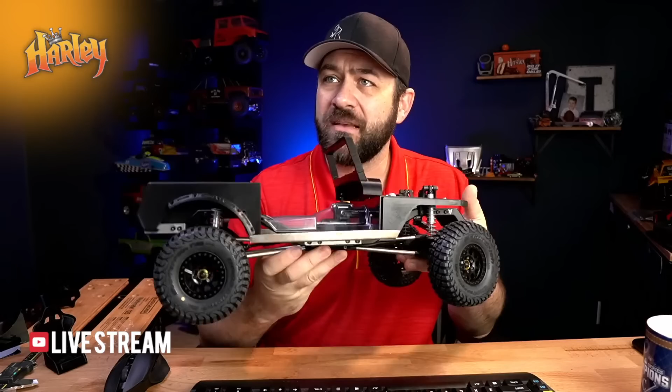But I am working on a project right now for Scale Nationals, my Class 1 truck specifically, and it's got a lot of 3D modeling that I've been doing for it. I've basically been designing most of the car in 3D so that I can get it fabricated, and I'm trying to use as many tricks as I can to get this thing done right.

This week, I'm not bringing the show back normally, but I figured I would show you exactly what's going on in this one, so it won't be necessarily entry level. It's just things that I've got to get done. That's why I fired this thing up. Does that make sense? Hopefully some of you enjoy it. Maybe it won't be helpful, maybe it will. We'll just dive in.

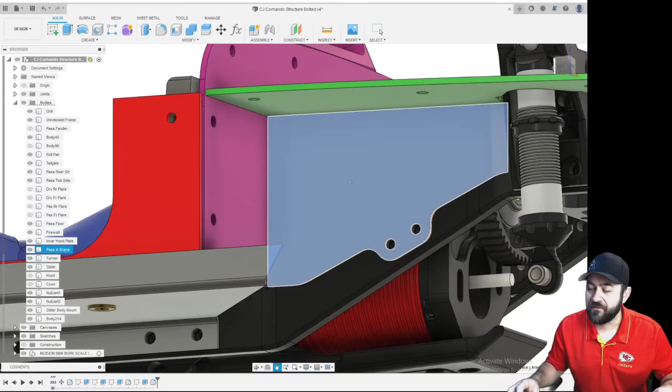So the plan for this thing is that I'll have these panels here - can I isolate just those? Let's see if it'll let me. No, it's gonna... we'll turn on the one, and I need the floor, passenger floor. There we go. So this is basically going to be the parts of the structure that will bolt to the chassis and allow me to fasten the body panels to it.

Now, I need to attach these things to each other, so that's kind of what I've been working on. I'm coming up with some parts that will allow me to attach them through and to each other.

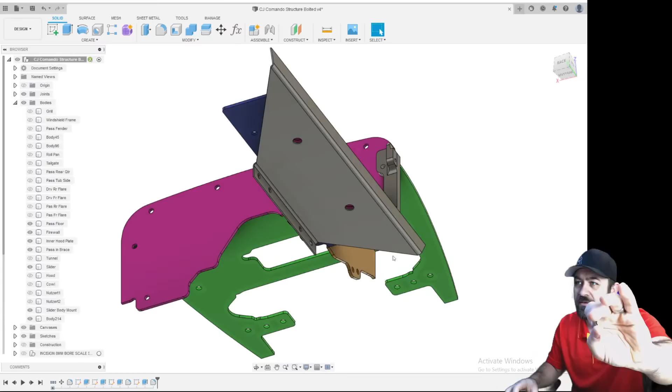There's this one that will go underneath of the floor and will attach to the slider. So my slider is this panel. Those holes that are in there are little nutserts, and you are not going to be able to see what I'm showing you here in my hand, but I made a test one just in a scrap piece of aluminum. Then I modeled that up so that I could see how the clearance would be for those.

And they basically sit inside, and I didn't even have to adjust my tolerances at all. These are basically a 0.5 millimeter away from the height that I needed. So it'll kind of lock into this, but everything will screw down into it, and it'll all just get nice and compressed.

Now, like I said, I don't have a huge plan today of showing steps or things to do. Just trying to show you what I've got going on.

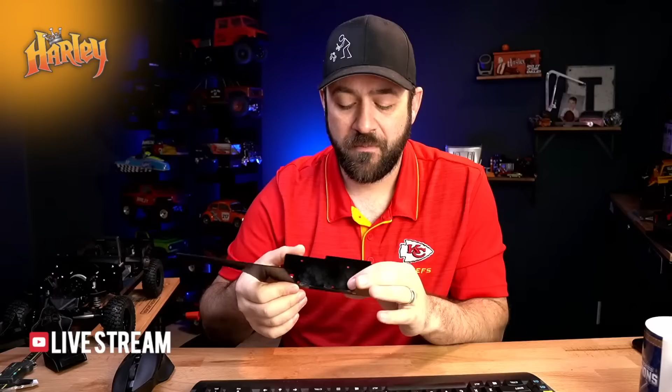So I had initially, in a different design - I'm going to switch back to the other camera for just a second - but in my first shot at this thing, I was going to have the parts use a captured nut system. You can kind of see like that, so the nut goes into a slot, and when you screw through, it kind of pulls everything together. There's a lot of chassis that have been designed this way, and it works okay, but ideally it works with thicker material. This is only 1.5 millimeter, or a 16th of an inch basically.

So it's not right for it, it's not the right pick. So that's why I changed to these 3D printed blocks that are going to help me attach things together, and also will help me keep the body panels all attached to each other, so that there's not big body gaps and things like that.

There's a lot of work in this thing still to do, but now I do have the VS410 chassis in here, the whole deal with shocks.

That's not something that is available. I had it because I have access to that from where I work. So that's a leg up, I will agree. I've got everything pretty tightly designed to that.

You can see this piece here, that's actually how it's interfering. That's because that's the mold for my inner transmission tunnel. It was designed to be the inner tolerances of everything. You can see how it's laying right on the floor and right against the firewall. You can't see anything because you're not showing on the screen.

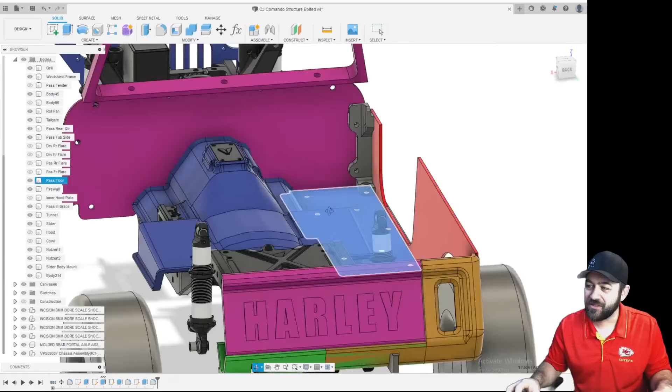So right now I've got kind of working through the thought process of how this is going to go together. The passenger floor, or the floor, is going to be attached to the slider with the nutserts. While these stick out, I'll have another like Delrin type slider plate that goes over that to keep everything from being seen or giving me catch points.

So that will attach to there. This piece will help the side panel and firewall attach to that. What I need to do is attach this inner fender to the cowl, as well as the inner hood plate, which is that. And once I get that all attached, it should make this thing a pretty solid system, I think.

So when I do that, oops, I need the firewall. I need the other one off. Turn that one off, firewall on.

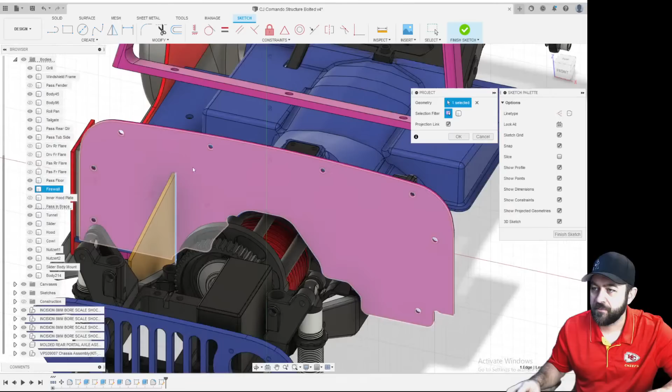So to do this, I'm going to do a new sketch, throw it on that firewall specifically, and I'm going to project a couple of lines. P for project, grab that inner line of that, and I'm also going to turn on that hood plate, turn off that firewall, rotate around and grab that, and then hit OK and turn those things back.

So that just gives me a couple of those things, and now I can isolate that, just turn everything else off. So you just go over to the body on the side, right click and go down to isolate or unisolate. That way it'll just clean everything up for you. Now the only thing it does is turns off that sketch, but we can fix that. There's a lot of sketches in this model.

But I'm going to try and attach this with, oh, I got 3D sketch on. I'm just going to throw a couple holes in the firewall for what'll go along the side, and then I'll probably throw a couple more across the top. Now I'm only going to go to the center line because I'll probably mirror most all of this work.

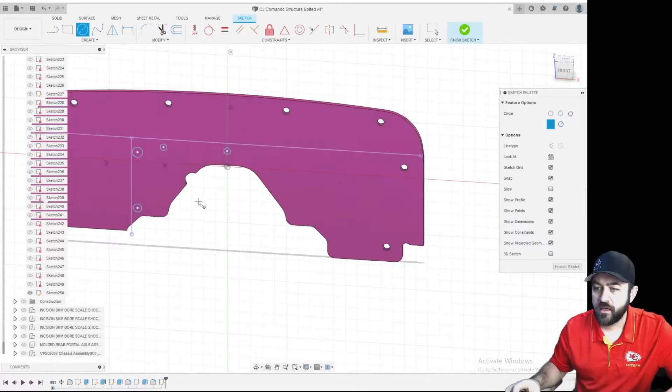What made you choose nutserts? Because the sliders are metal, so it just gives me a nice solid base. That way I don't have to try and weld a blind nut or anything like that. So that was why, really.

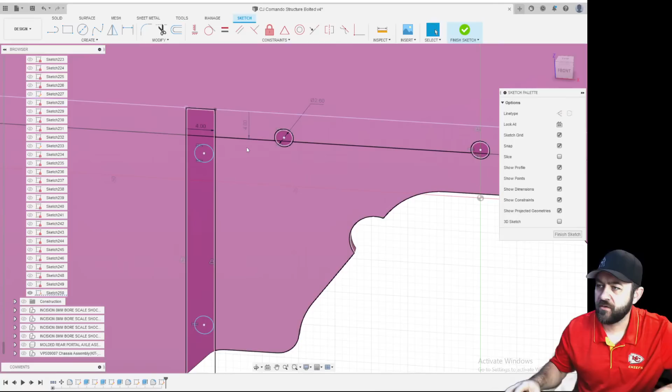I'm going to do an offset line, and I'm going to do like, five's too much, I'm going to go 4. We're going to do 4 down as well. I'm going to turn both of those to construction lines. They're just guidelines for me.

So select them and hit X, and then we're going to make sure that those circles are on those guidelines.

Simple stuff there. Now I haven't dimensioned really where those are going to go, it's all kind of just arbitrary. I like them to be whole numbers, but it's not. I want them to be spread apart enough to help even the load out, make sure everything's nice and supported, but in a way that is just enough. 22, yeah, I like that. I don't want anything to be too close together.

And then, like we said, I want it to be on the center line because I'm just going to mirror it. That got fully defined already because it's a horizontal line direct from the origin.

Now we are going to do another offset line. This is going to be part of the actual thing, but we're still on construction. I'm not going to go too far out, I think 5 is likely enough. My computer kind of struggles with some of this. It's not a weak computer, but there's so much going on in this model that it can be a little wild. You can see those lines intersect, but that's just because I'm going to do an offset on those.

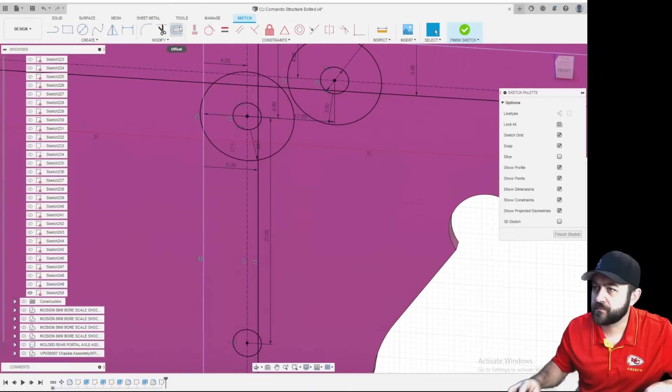So we got that going on. I'm also going to project, hit P for project, select that whole face. That'll give me the outline of everything. I don't need it, but you'll see what I mean. So I've got all of that line work done.

One thing I am going to do is throw a construction line, and actually I'm going to make it a real line. And I finished it up to the top, but you'll see.

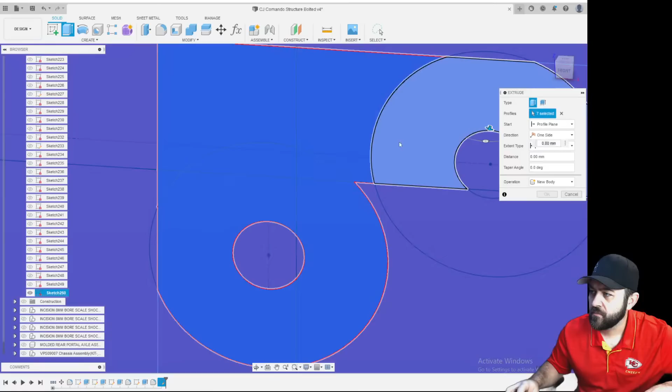Now we're going to hit E for extrude, and then I'm going to select the profiles that I want. Oh, something's weird, try that again. What is it doing there? Somewhere in this area it was acting funny. It's just going super slow since I have so many profile regions. I don't know why it's doing that.

Down here we could grab, we're going to grab it at least. Why not? Okay, so we got that. Now I'm going to pull this up, let's say 4 millimeters, but we're going to do new body, and hit OK.

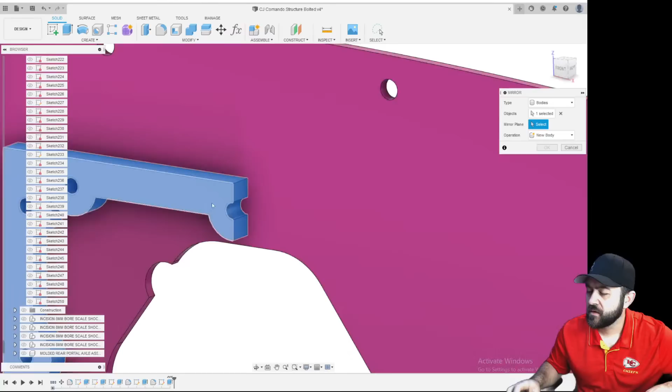So the simple but ugly looking part, I am going to mirror this. We're going to select bodies. Okay, and I did mirror the trans tunnel profile, so that gave me something that still looks reasonable.

Brian Sherwood, thank you, sir.

I missed that one. Are you sure this is not the new body for the next Vanquish? Yeah, no, I don't think so. For one, I don't think this is a fantastic looking body in that way. This is an exercise in being ridiculous for the sake of being ridiculous.

So we've got a couple. I don't know if it'll let me throw two on there, and no, so I'm going to just kind of cheat. I did a 2 millimeter fillet there. I'll do it again now, and then I can clean it up. So we'll stretch this thing down 3, yeah, there we go.

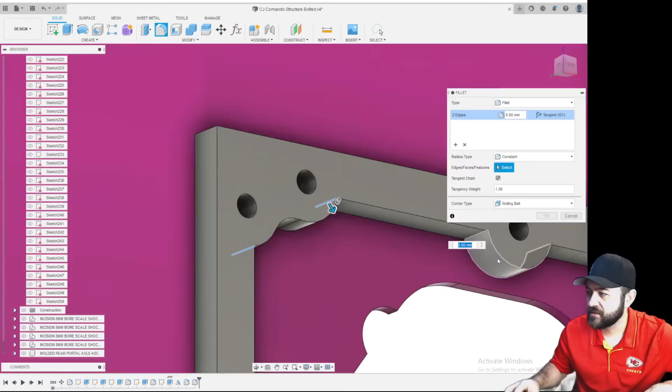Okay, so now I can kind of clean up the part a little bit, add some fillets in the corner. I'll need to do the same thing in that upper corner there, but this is just to smooth it all out a little bit. I don't know what it'll do down here, let's see, that'll be right.

Is this for Scale Nats 2023? I mean, with the amount of time I have left, you would think that that would be the case. But no, I think that I can accomplish this in time.

We're going to turn all those panels on here in a second, and I'll show you what I'm thinking. And now this is only for the holes that go on the firewall. We still have to do the holes to attach down to it to clean it up a little bit more.

I don't like sharp points on 3D printed stuff like that. Just trying to make it a little bit smoother so the printer moves smoothly, just smooth motions the whole thing.

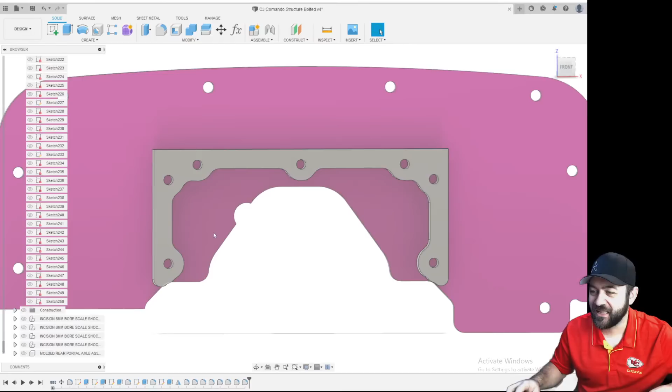What's with the TRX4 Super Heavy version project? It's just one of those projects that I work on when I'm feeling like doing something ridiculous. So it'll keep going, there's more to come on that.

So the chassis rails in the front of the VS410 have a taper in. You can start to see a little bit of interference there. So we'll have to make a cut to make sure that that's compensated for, which is easy to do and not a big concern.

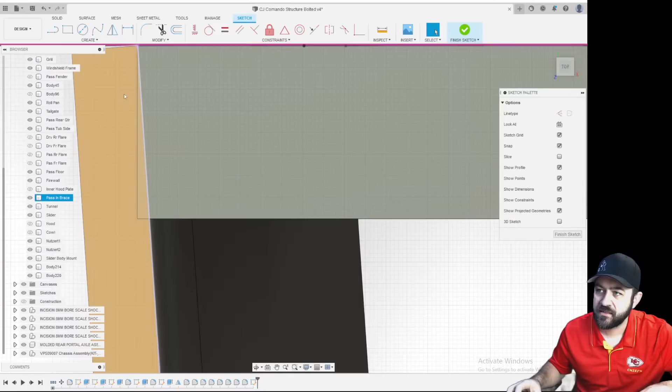So let's just do that now. I'm just going to make a sketch on top. I'm going to hit project, and I'm going to select that inner line and the full face. Then I'm going to select E for extrude.

There we go, we're just going to drag that arrow all the way down. And you can see that's running into all kinds of things. But on the right side here, we're going to hit objects to cut, and we're only going to hit that new body. So now there's no interference there.

Now I had overridden and turned on one of those sketches because I had isolated everything, and I don't know why that one's on.

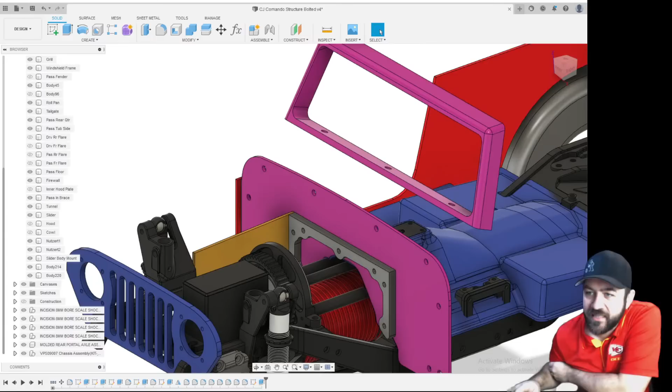All right, I'm going to read just a few comments here for a moment. Let's see - should we have cleaned up corners before we mirrored? Probably. Just flying through randomly without.

Now, one thing you'll notice is I only have a very small amount of history at the bottom of the screen here. When these models start getting wild and complex, I'll turn off design history. I'll come in here and hit do not capture - see in the bottom corner, it says do not capture design history. I'll turn that off and it'll clear all my history out, then turn it back on just to get things started again. While that takes away your ability to keep going back and forth, it makes the model run a little smoother and you don't end up with errors and things like that. You just have to do things manually a lot.

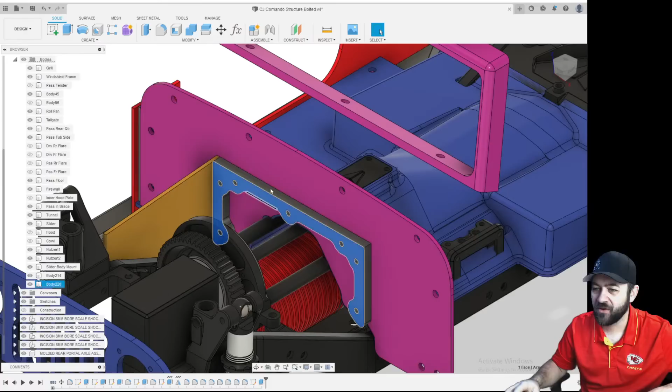So that's kind of part of it - this isn't typical of how I would just do a simple part or a simple something. Maybe just in the spirit of STL Sunday, we'll finish up this one part, and then I'll just do a random suggested item, because why not? Aardvark Spleen, bring back STL Sundays.

Is there a place we could download the VS410 chassis CAD? No, there's not - that is not a shareable file. That's internal use only, and luckily for me, unluckily for all of you, I'm the only one. That won't be shared.

So now I'm drawing a sketch on this side. Let's go. And we're just going to make the bosses so that we can attach this part to the other.

11-pound class 1. Now, there's a lot of extra stuff on here, definitely not needed for competition and stuff like that. But in the end, the fact that it's all going to be carbon fiber or other lightweight materials, I think especially the body panels and things like that should be pretty light. And the cage is going to be titanium. I don't think in the end that this car will actually be heavier than expected.

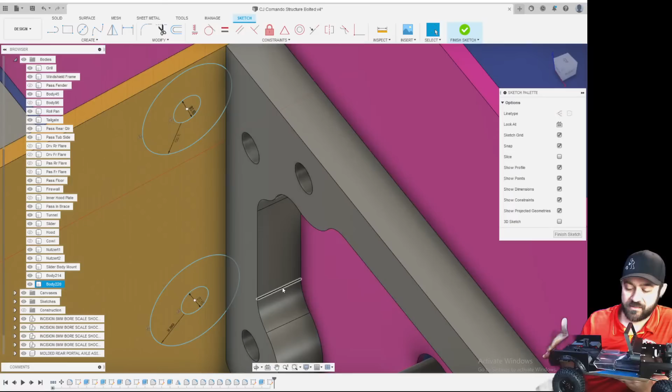Now, I'm not saying that it won't be a 7.5-pound truck. Right now, of course, you can only see like a pixelated version of it. But right now, with 3D printed body panels, no cage, no electronics and things like that, it's about 5 pounds. But that's just because the VS410 chassis, these F10 axles are pretty beefy. I've got weight inside of the KMC Enduros that I've got mounted on here. I've got steel sliders on it right now.

But for my class 1, I'm just not super concerned. Matt and I had said we're going to be competitive, and honestly, I think that I meant class 2 or 3. Class 1, I'm still building to the rules, but I really just want to have a lot of fun.

So let's put that in there. We're going to finish up putting some of these bosses on here. Oh, there's a spammer - someone grab that. And let's put that at 3. Define the distance at - just trying to take a look around, say 22 is fine.

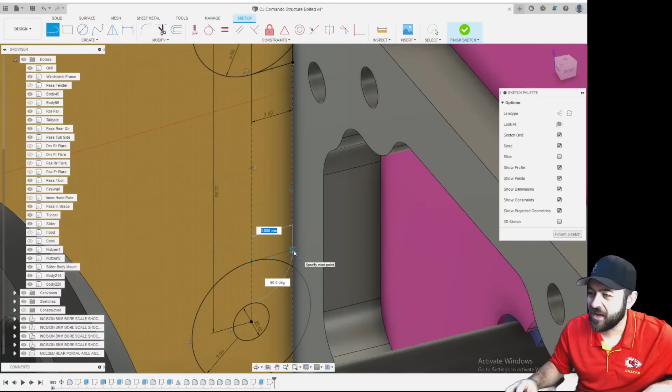Okay, now maybe this rig takes Concours Best of Show. Oof. I think that the biggest problem will be that this won't be - it'll be a best of show if you maybe care about an overcomplication of something that shouldn't have been. But I think you'd have to be a real nerd like some of us to appreciate it beyond that.

Okay, connecting some dots here to create these bosses.

Is there a way - let's see, is there a way to get the print file for the transmission tunnel? I mean, yeah, but I don't know that it will - like this thing, I don't know that my tunnel will do you any good. But I have no attachment to it, it's not going to do me any good.

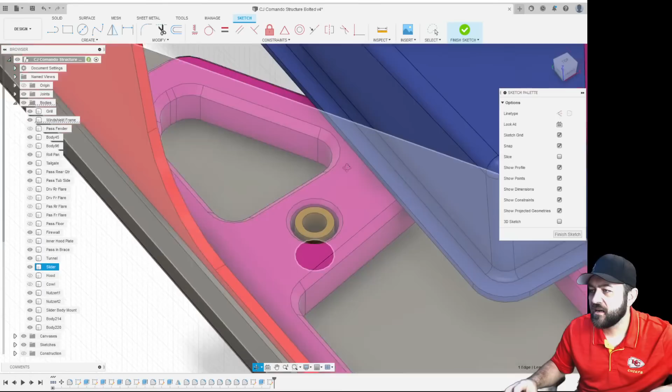Do you chamfer holes for the screws and lock nuts? We do it when 3D printing. I do, let me hide that floor. So you can see here, this is a part that's ready for 3D printing, and you can see I've got the holes chamfered everywhere. I like putting chamfers on parts anyway, I just think they clean up so much better. I do throw chamfers on, usually 0.5 millimeters around these holes, and 1 millimeter on the inside.

All right, let's finish this guy up. So I did this sketch right against this inner panel. If I try to make this, you'll see we also have an interference here, but the screws will come from the outside, so we're going to trim some things up, but that's not a huge deal. I'll go maybe 4 millimeters, and when I go to join, it's going to want to create this side panel and this as one big part. So I'm going to turn off that brace, and it won't do that.

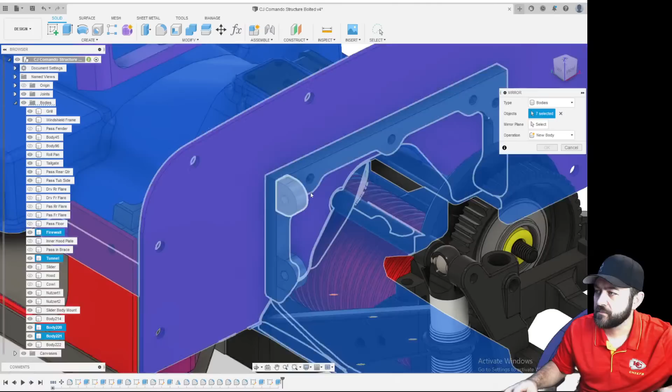But actually, I'm not going to do it that way anyway. I'm going to do new body, because I'm going to mirror these bodies to the other side. So mirror, we're going to select those two, and then mirror it off the center line, so it puts those two bosses to the other side.

Which bearing retainers work on the VFD twin? The standard 30 tooth, I think, the regular ones that come in the regular VFD.

Did you take into account the bulge of the riv nut on the back side? I did, Ben, did I? Let's see, I'm a slider hidden. So you can see this step in here. There's an extra step, and that's because that is about 0.5 millimeters larger than the diameter of the bulged part of the riv nut. So that is how I took into account that.

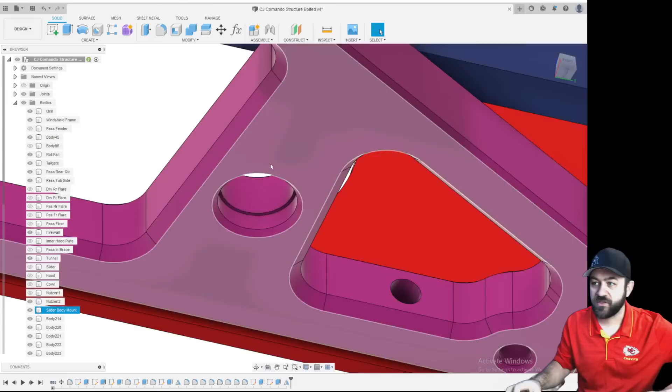Craig Banks, will these trucks be carry-on when you fly? Yes, I carry on. When I travel for an event like this, I absolutely carry on the trucks, and I usually check my radio and my clothes, of course, but I always carry on the trucks because if I don't have the truck, the whole trip is worthless. So I carry on my trucks. If the radio got lost, I can get a new radio, I can go buy one somewhere. Worst case scenario, rather than completely wasting a trip, I'll go buy a new radio, new clothes, whatever. Trucks are irreplaceable for that time period, right? So yes, I carry on my lipos and my trucks - number one concern.

All right, so now that we've got all of those bosses there, we can combine all of those bodies. Hit OK.

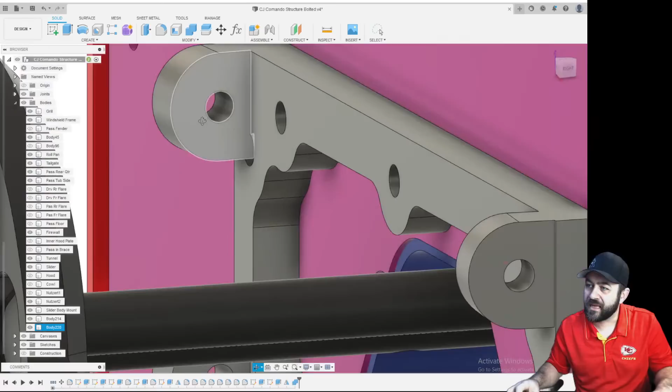So like I said, we do have an interference problem here. I'll probably just end up blowing that through hole through a ways. I could carry this up more, or move that down more, but I don't have that much concern with it. I'll probably just knock that hole all the way through, and then add a bunch of fillets and things to get it reinforced a little bit more. Now I do need to put the corresponding holes into the panels so everything can get tight.

Aren't your screw tips very straight and maybe make more curve joining the main part? Fixing - ooh, I don't understand what you're saying.

What do you transport your rigs in? I usually transport them in my normal carry-on bags. They usually fit, you know, my max size carry-ons, so that's usually the route I go. And since I'm carrying them, I know how they're going to be handled, so I'm usually pretty careful. I'm just looking at how that's all going to flow, and I think that will work good enough.

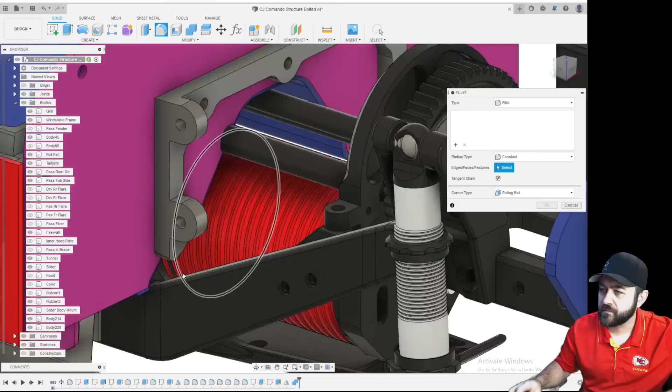So we'll get both sides.

Before we get too far, let's go ahead and get that hole thrown through. So I created a sketch on that back side. I'm just going to hit project, grab that surface, hit E to extrude through, cut through. Maybe a hair weaker than I would really like. If it becomes an issue in the future, I'll do something about it.

Do you wear Crocs at the TSA checkpoint? No, I will not travel in Crocs. Oh damn it, I didn't notice that one did it too.

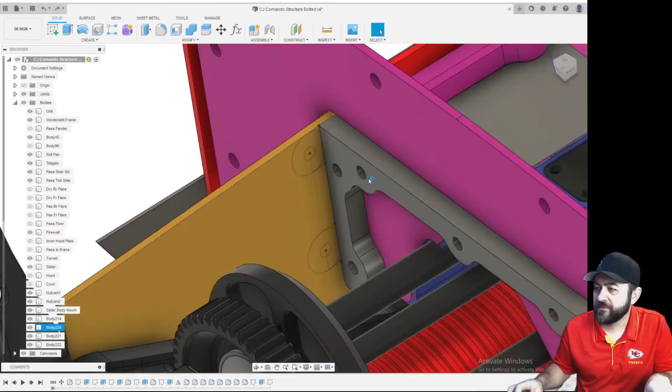Let's see, I'm hitting undo a little bit. I mean really... carry that one up a little bit more. I'm going to hit P for project, so I can see where that one is now. I'm just missing it, I moved it up 2 millimeters.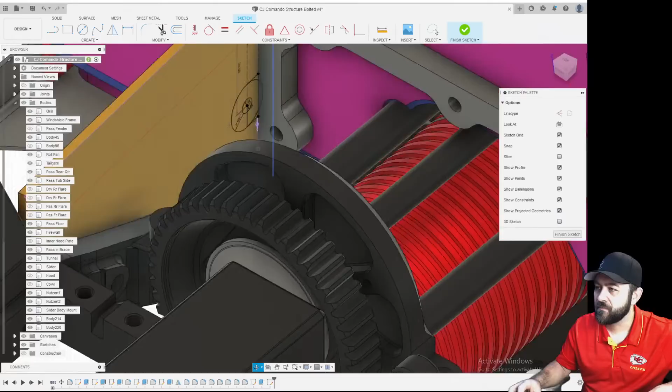That top one wasn't too bad. So this would be an instance where going back in my design history and moving things around... actually I had design history on, I forgot. I could have gone back and done that, but I've been using design history off on these just because of how complex some of these have gotten. I think I'll be okay with this. I'm just looking, I want to make sure this structure is supported enough, like I could go down further maybe, but it gets pretty complicated down there too, so I think I'm gonna roll with this for now. I'm okay with that. That top one wasn't so bad. It'll be okay.

Fairly straightforward beyond that. I'll probably work on getting that. I do need to do the top part as well because we're gonna have more intersecting holes there. Now I could bring them further out, make larger bracing. I probably shouldn't add too many fillets until I get all of that done also.

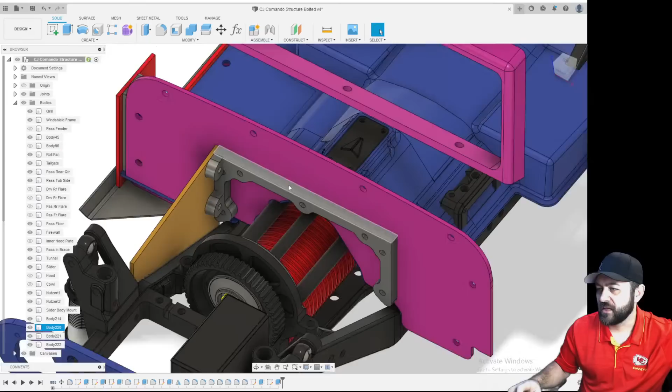Will there be a place at your trucks and mats event to see close up? Yeah, I mean, some friends of ours said they'll have tables and stuff for us, so I'm sure we'll be hanging out with our trucks sitting around. Most of the time at these events is spent sitting around and talking anyway.

So anyway, is there anything else you guys want to see on this truck? Otherwise we'll come up with a part and design something up. For old time's sake, party at the lake house. Exactly, Ben, I am stoked.

I'm going to turn all this stuff back on. Would just one hole be enough? I don't know, it's like the structure that I'm going to have everything bolt to. I want everything to be sturdy. I don't know, I have a hard time saying that one would be enough.

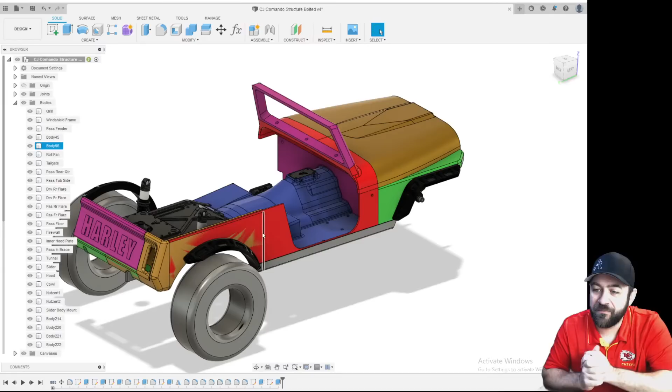What is... oh, I've got some overlapping parts there that were done, but I still have a lot of work to do on this thing. Today I think is going to spend... make some front tires, they're just off currently, but I do just have donuts rolling around in this thing. When I designed this initially, I'll go to one of the other ones.

Is this the latest version? I'll go to my assembly file, I'll show you that. Over design everything. Exactly. So like I said, you can see all these files here on the side, these are basically all for this truck. In each of those files, I design a portion of something, and then I bring them into this. Now there are a number of files, a lot of things missing because as I redesign things or rebuild, I take out the old, and then the final parts will get brought back into this.

It's just updating some references right now, but un momento por favor. Doing doors or leaving it open? Leaving it open, no doors.

Okay, so you can see here, the front of the chassis will get cut significantly further back, and then there'll be a bumper there that will be just to the front of the tires. I don't have the cowl in on this one or anything like that, that all has to get brought in. This has got the old structure style, and those need to get removed because that's all old stuff now. That's some old stuff.

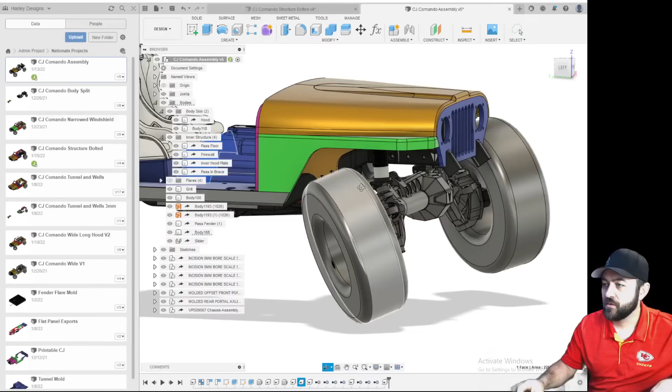Are you designing an interior? Oh yeah, never mind, yes the interior, that was what this panel was, that was the mold for it. Are you running portals? Yeah, I'm running the Vanquish F10 portals on this truck. So it was designed at full bump, meaning the suspension all the way up and the tires turned, so I can see what my clearances were going to be.

And the battery goes where? So for this I'm going to have two different situations. The battery for this will likely be housed in an area here in the front with a cover, so you won't see it, but I'm going to be running a very tiny battery. So it's not ideal, but for competition I want it as low as possible. There's an area up here, and I'll get into that and how that's going to be done later. But it is what it is, just for competition.

But if I ever want to run it normally, which would be a reasonable situation, underneath of the hood on top of that plate, you can see there'll be a cutout where it'll be able to drop down in here where I'll be able to run a 1300 milliamp 3S pretty comfortably. 3D printed firewall. Yes, absolutely. But yeah, this plate will have a knockout in it so that a 1300 milliamp 3S pack can fit under the hood, on top of the trans, and up front.

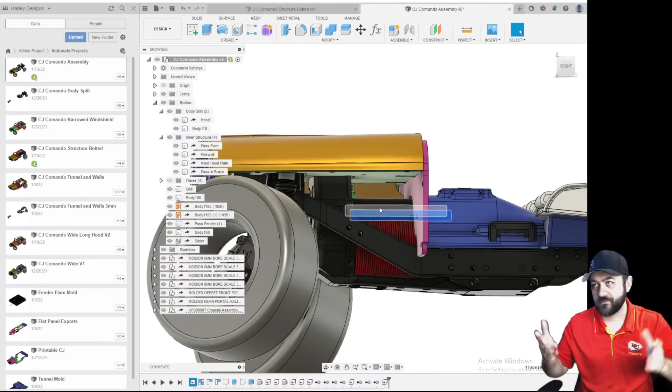But that's higher than I want for competition. So the difference between a battery sitting up here versus down here is pretty significant.

Are there any small hard case batteries under? I don't think so. I mean, you could print your own hard case if you wanted, but hard cases usually just take up more room, so I'm not usually that concerned with those.

I can't remember the most up-to-date cage that I have, but I'm looking forward to it. I actually have not done any cage templates from Fusion 360. Though all my old design templates for how cages and things like that are done come from old programs I used to use when I was in civil engineering.

But oh, this is the correct one. This is about the style of the cage that will go in here. I've got some lofty goals for not just titanium welding, but how I plan to fixture this for construction, because I want to actually do some fixtures, which we'll see.

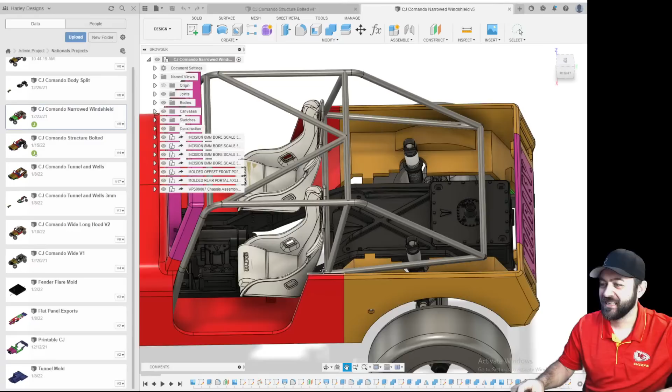We'll see. And I need to design some plates that will go down to the chassis, come up. I'm going to have them capture the shock mount and get into bolting to the cage. But that's all got to be out of titanium as well so that I can get it welded to the chassis. We'll do some style back there.

I also think I want to 3D print a rear seat so that it's for the scale points. It'll be a drop-in and remove situation though, because this is not the style of cage that I would want to run if I actually had passengers in the back of a Jeep.

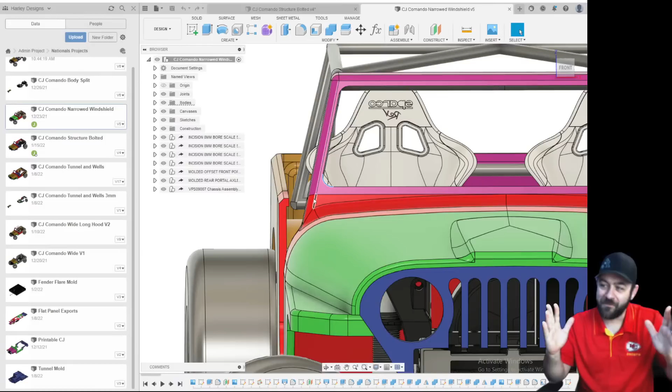But you can see my windshield, it's tilted in, it's got a decent amount of tilt. Now the actual windshield, the widest part will be down here at the base. On an old Jeep, this is a modern recreation of it - the windshield frame would have been basically at this surface, coming straight up. But I've been able to bring it in a little bit, which will also help me with my bumper width, because now my bumpers will only have to come to about this corner of the front fender, since that's how wide the windshield is.

What, scale rules? I mean, I could make this windshield ridiculously narrow, but I think this still looks... it's not a narrowed windshield, it's a wide-bodied Jeep. Right?

Pay no attention to the file name.

So, Fusion 360 or SolidWorks. This is Fusion 360, the paid version, which doesn't really change anything. I just do it because when I make things or manufacture for CNC, if you don't have the paid version, you don't get rapids, so everything your machine moves at the speed of normal cutting, which is painfully slow. I think it's like $400 a year that I pay for this, but it wouldn't really change anything versus the free hobbyist license, and you can renew that for free continuously. They don't make it easy, but if you go on the Fusion 360 groups on Facebook, you can find pinned posts. Don't go on there and ask, because that happens 10 times a day - it's like the most hated question.

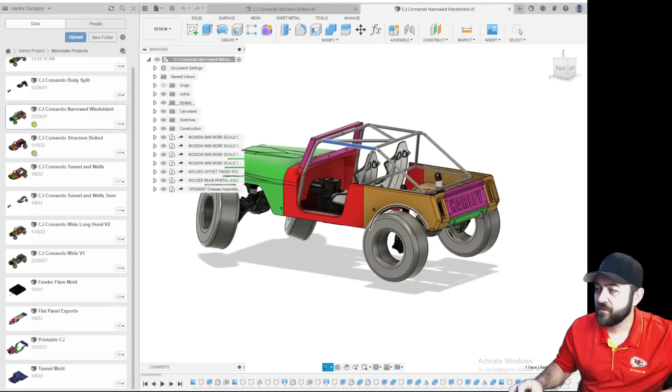Little bits of everything. I'm looking forward to getting some of the carbon fiber done. This is the old body mold where - do you use Fusion 360 at work as well?

No, I don't use Fusion 360 at work at all.

We use SolidWorks and Mastercam at work. So this is just 3D - once you can design in one 3D software, you can usually design in most of them. It just takes a little while to get used to the buttons, but once you can do one, you can do any of them. And $400 for a seat of Fusion 360 is way cheaper than me having to get a version of SolidWorks through some group, like trying to get a discount through AMA, and then getting a CAM program to actually write tool paths. This is just all integrated for home use. Super simple for me - I'm more than happy to pay $400 a year for the functionality it gives me.

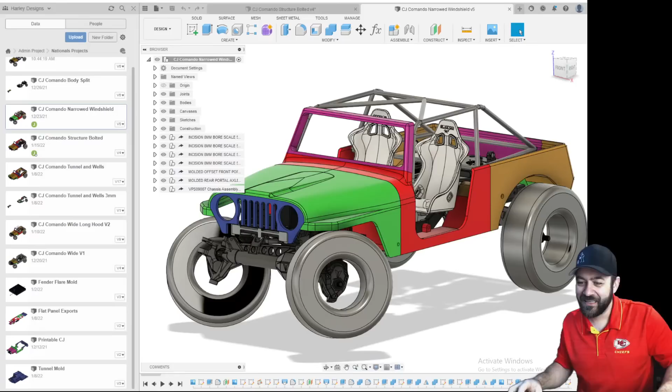Okay, do you guys want to design a part for 3D printing, or you want me to just keep plugging away on useless stuff that doesn't exactly apply to what you actually care about? Flesh tone, yeah, I can only imagine the shape of it. It's going to be very rudimentary - could look like Slender Man.

Scale porta potty with door and toilet seat. That's not a bad idea - although isn't there a bunch of those you can already 3D print, Ben? Doormat, 3D printing? Wait, doormat what? Oh, make a doormat in a 3D printed part - let's do it. I agree.

I'm going to save this. I can only show you so much of my scatterbrained, back and forth, useless to you part knowledge of a project that's overcomplicated and rushed. I started on that Jeep body like 6 months ago, at least.

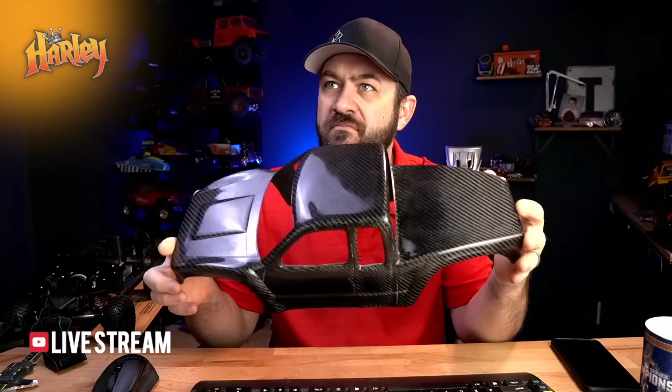And upload the chassis brace for the Wraith 1.9 you designed. Possibly, but I've thought about that and I honestly don't know where it is. I designed it before I was using Fusion, so it's in SolidWorks somewhere, somewhere at work I guess. But I did a dash - oh, I didn't remember that.

I need ideas for my Ecto Power Wagon body. Let's see, I did not remember doing a dash. I don't doubt you at all. Oh, I do actually remember doing a dash now - I remember because we did it for the... let's see, like you hate flat rail chassis yet? I know, it's exactly - I'm going to use them, but...

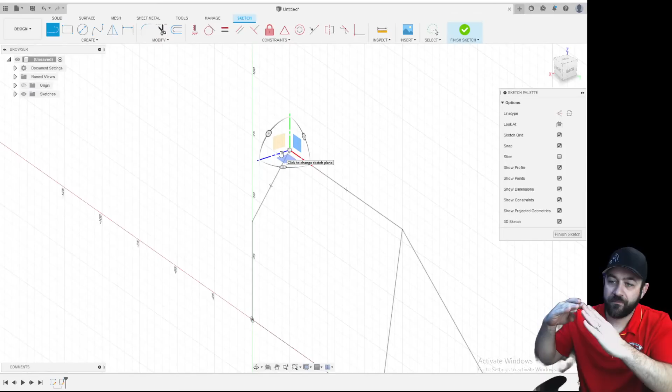We're going to come up and select that start point there, which is the top of the A pillar. Now, we're still on the side because that's where our grid is - you can see if I was drawing a line, it would just be drawing in this plane.

As you rotate a little bit, you can see these 3 dots on these arcs. If we grab this one, which is in that side plane, or kind of front to back, you're going to grab that and rotate it 90 degrees. It doesn't matter if you go left or right, but you're going to go to negative 90 or positive 90. And then we're just going to draw a line.

So now I'm going to assume that I drew that 2D profile at the center line, because I only want to do the work that I have to one time - I don't want to have to do it twice. And cages, in most cases, not always, are symmetrical.

So we're going to do that, and then we're going to define the width, which may be, say, 60 millimeters - that's fine there. And we're going to draw another line, select that point, and do that same thing - go to 90 degrees.

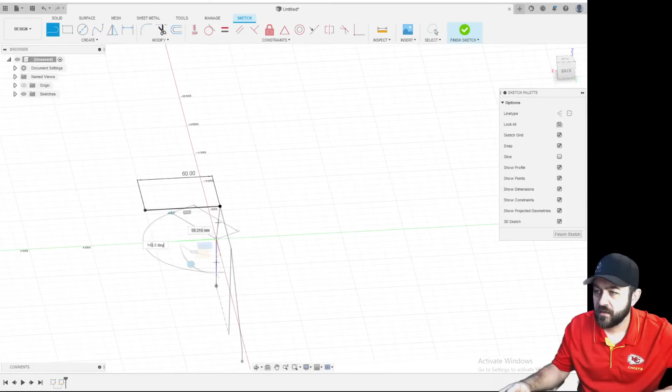We're going to go out. This one's likely going to be a little bit wider than the top, so we'll go 70. And I'm going to kind of just do this at every point - a little bit of a pain.

And this one is likely same as the top. So we're going to go through and I'm going to finish this out - 90, this one probably the same as the top of the A pillar or the windshield bar. As we get towards the back, maybe it tapers in a little bit.

Now, as I kind of go this way, I could just key in - I was at 60, we'll go 55. I have 2 more points left, so I can key in 90... 90, 55, and last one down here.

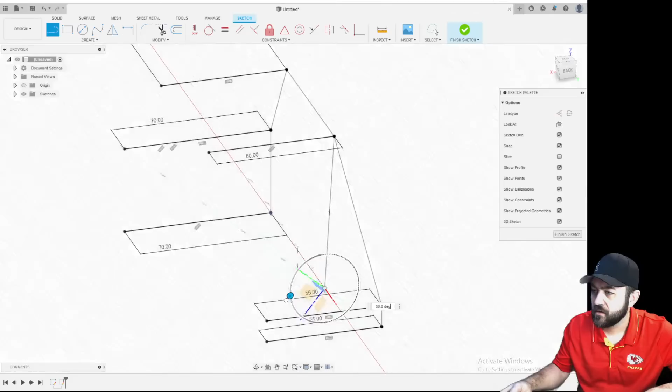Rotate this. Well, it may be, honestly, we probably should have had some sort of hip bar where maybe it wasn't. Let's go 70 - actually, we could do that still.

I'm going to define a point along just that solid line that we had, let's say the halfway point. We didn't have a node there, but we can kind of define one. And this one we're also going to bring out to 70. So now you can see that we have all of those points.

Does mirror not apply on this case? Mirror wouldn't apply like I'm going to mirror the tubes, but the sketches, not so much.

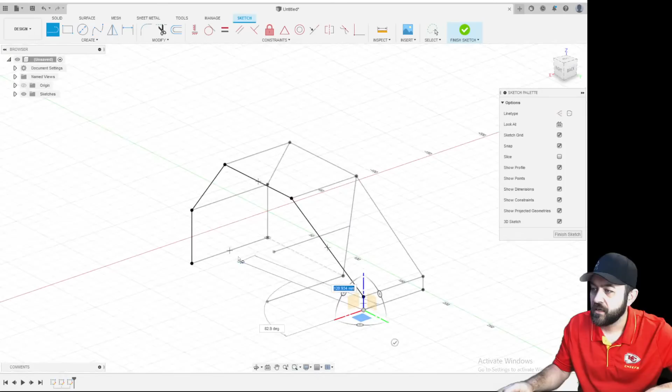So I'm going to finish that sketch and make another one. Again, I'm just going to select a point. 3D sketch is still on though, so we're going to click from there, and then I'm going to start connecting all of those points. Since we're in a 3D sketch, it's going to allow me to do this. Now, in this case, I just did what could be done as one chord, or one unit, throughout that whole tube chassis.

And in that case, I should just go back and edit that sketch because I'll want a radius on these. My bender has got around a half inch radius. Then you've got to deduct half of the width of the tube, so you can do 10 millimeters. If you want to get super precise, you can do that as well, but for the sake of this...

Now I'm doing this on this one for a reason, I'll show you. So we have defined how that could be bent as one piece.

From there, we can go up to create and we can do pipe. We're going to select the path - it's got chain selection on, which is what you want in this case. We're going to select it and make our section size 3/16 of an inch.

What is... I don't know why it won't do the conversion for me right now, but 3/16 is 0.1875, times 25.4 is 4.7625 millimeters.

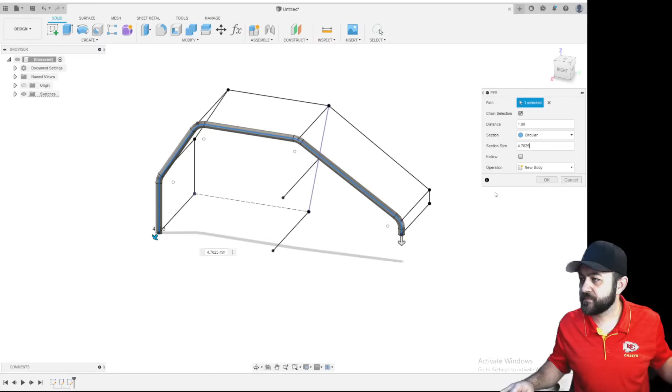Design the inner cage for a cliffhanger for your class 2. Yeah, but I don't have... I think I have a lot of things left to figure out before I can do that.

You can see this tube looks a little large because this cage is a little bit small.

But what type of computer are you using for that? This runs so smooth - I built this a while ago, but I think this is only a Ryzen 5. It's got an EVGA 2060 KO graphics card, and I think I'm only running 16 gig of RAM. My design computer is in the other room - it has a lot more horsepower, but this computer is still plenty capable.

So in here, you can see that. Now, the reason that I did this cord is because, while yes, we designed all of these nodes, now that node is no longer in the center of that tube.

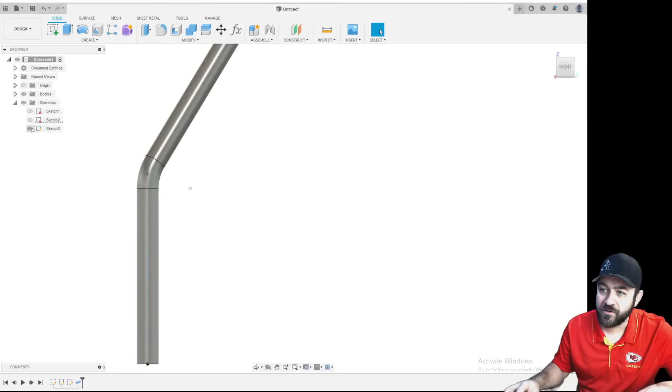So I'm actually going to turn off that second one. I can even turn off that first one, but we're going to turn that second sketch back on because now that has all of those points. While this doesn't make things super simple, it's kind of a pain.

So normally what I would do now is, rather than trying to land that tube at the midpoint of that radius, I might try to wake up that center point like that. I clicked on that center point, and now - oh, it defaulted, which is good. So we're just going to pull to that and it'll allow me the center point.

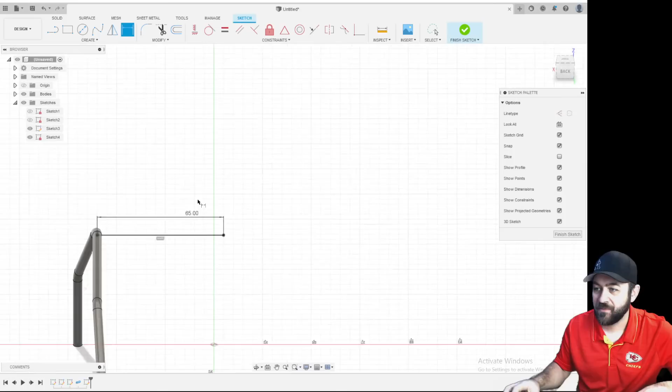My origin still shows way down there, so technically I can get away without it - as long as it goes past the midpoint, we're kind of fine. So let's just go way past the midpoint, and let's do like two of these.

65 is fine. Let's do one more, why not?

So hover over that arc there, it'll wake up the midpoint. It's being a pain, so let's hide the body.

I'm just doing this because you want to go off of the actual tube design. Finish sketch, turn the bodies back on.

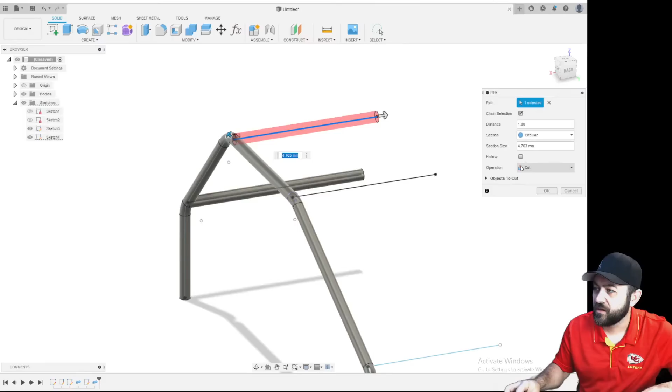Now you could do pipe again, and select - I guess it's only going to let you do one - don't do cut, do new body, and we'll just rinse and repeat that whole thing. Oh, I got to turn that on, it'll hide that sketch if you don't. New body, okay.

Now, I was talking about going past that midpoint. We can do a simple thing - we can come in here and do split body.

We can do body to split - I think we're going to be able to select all of these. And then the splitting tool is just going to be our right plane, and it's going to cut all of those.

So then I could delete them and I'd have half the tube. Or the other thing I could do is just do a mirror - select the bodies and select the mirror plane. And now those are mirrored to the width.

I could have done that at the same time. Let's just go back and modify that same thing - well, that joined them, so actually I'm okay with doing this separately. Mirror that, and then mirror.

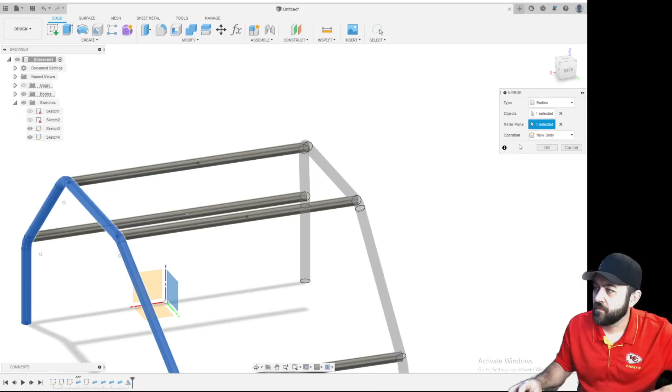So that gives me the cage, and all of these pieces are still individual mirrors, or individual bodies. So I could turn off any specific tube, but that will also give me the ability to make templates of each individual one.

I can also do my proper coping of my tubes by doing a cut. So we go up here, there's this combine function at the top. If we hit combine and we do a cut, our target body is this tube and the operation is a cut. The tool body is the main tube. So you can see it's going to fish mouth that tube, as you would call it, or cope the tube, however you want to refer to it. But you want to make sure that you hit keep tools so that it does not delete that tube you made, and then hit OK.

I would probably want to do that before I did all of that mirroring. That way it carried everything over to both sides.

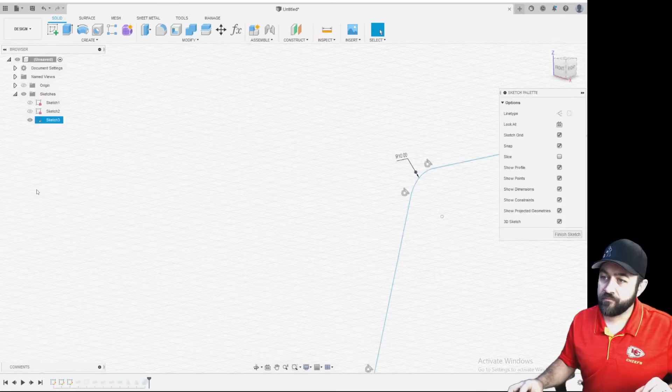So do that. But now if I hide that main tube, you can see that you've got an actual tube there. So if you wanted to create a drawing from that thing to make a proper template, you've got all of just the right information available to you.

From there, you can do your cross bracing.

Also, if you weren't doing this for metal fabrication and you wanted to do this to actually 3D print a cage design, you would just not do everything as separate bodies. You would just combine all the bodies as you went. So rather than cut, you do join, and you just make all of this one big piece and go from there.

Oh, that one I got a little bit off kilter, didn't I? I didn't have that one along the axis properly. So that was my mistake. I wouldn't want to continue with that.

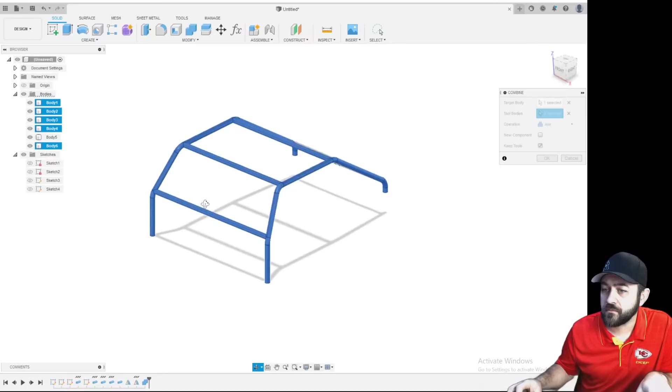So this is along the same lines of how I created the cage in that commando. So if I was going to do, say, just a simple roll bar for whatever project you had...

Front, I turned off 3D Sketch at this time. What would the roll bar width of a typical...

I've got my Power Wagon here next to me. Back of a Power Wagon body, you know, call it 120 millimeters. So I'd go somewhere around the 60 mark, come up and over.

What if you want a bend in at the upper windshield bar? You would basically do the same thing. Like I think mine had it there - it went up and then it kicked in and it went across.

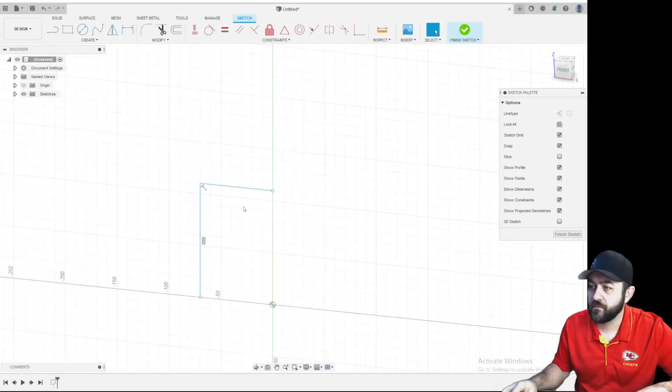Some of that is fairly simple. So 60, that's half of the width. Height, let's say we just do generic height for a Power Wagon at, say, 100 millimeters.

That's handy. I like how it did that. It's exactly what I wanted.

What is it not wanting to define? Oh, I think probably that lower part. Yeah.

So if this is, I'm going to design this as if I was going to do an actual 3D printed part. So we're just going to kind of roll through this thing. Let's even just do it wild simple. Let's do this thing as 5mm.

Then let's do something like a double roll bar, or double B hoop, whatever you want to call it. I'm going to do - oops. We're going to do that move command.

We're going to select it. First, I need to get the rotation point correct. We're going to hit create a copy, and we're just going to do, there you go, 8mm separation.

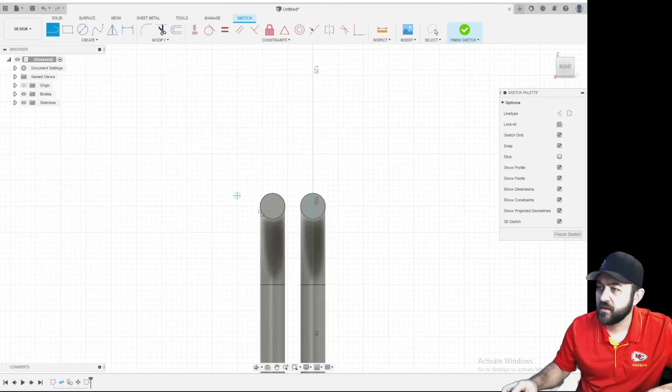Let's do that. I'm going to turn 3D sketch back on. We're going to do from center to center there. Give me that point - doesn't want to do it.

I'm going to turn on my first sketch again. There. And let's see, we're going to go 8mm at - what is that degree? Would be 180 degrees. A couple of pieces like that.

We could even probably grab one down here just for - and I just know that that is 8mm at 180. So let's do finish. I'm just doing these as some little connectors between.

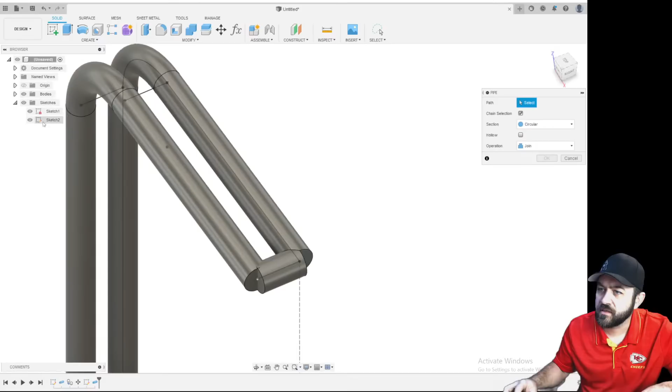It's only going to let me do one at a time. So we're going to do a join. Fine with that. Same - I got to turn that sketch back. Just going to repeat that a few times.

So some little connectors, and we'll of course mirror this at the end.

Is PLA strong enough for a cage, or should it be done in PETG? It all depends on how you drive, honestly, or how beefy you want to make a cage. That's the other thing, right?

I'm going to do a sketch here at the bottom, and carry something back, say 70... whoa, what did I type? 75mm, let's go back over, yeah, 40. And then we're going to connect from that point up to that little funky tie-in point.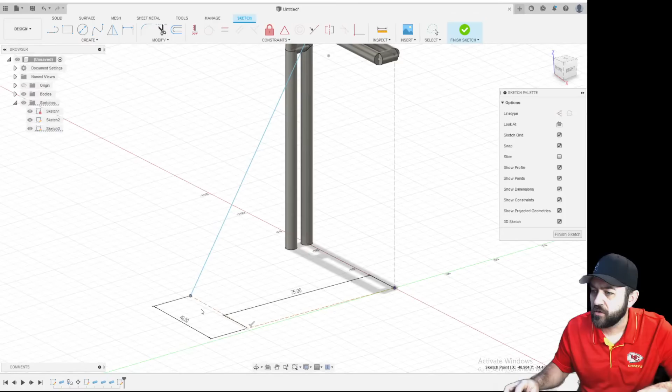Before I finish this sketch, I'm going to make these two lines construction lines. What does it not? I just want to check why that line is blue. Ah, okay, so we're just going to do, there we go - those two lines weren't done in full constraint.

So pipe, join - or let's actually do, since we're just making things, new body. And I'm just changing it to create a copy. We're just doing things silly for being silly. Now that we've got these things separate, we can do a join. I'm just going to join everything together. It's fine.

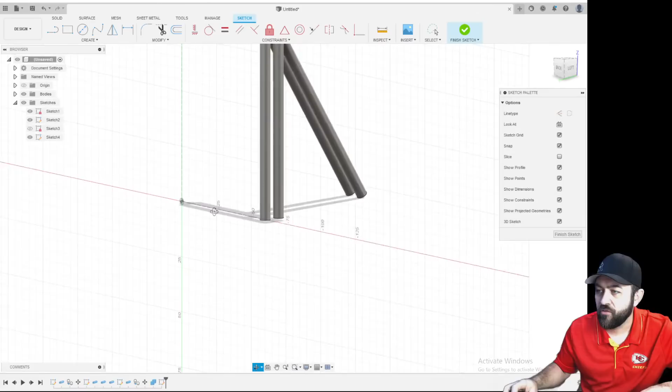Now, we're not going to mirror it yet. Say we were going to do this as something that we actually wanted to 3D print, I'm going to do these steps - you would have to kind of use these similar steps. I'm going to turn 3D Sketch off so that it doesn't try and grab any funky points.

But we're going to do something like this. Let's say that this is going to be 10 millimeters wide and something like 16 high. And we'll just throw a couple of 3.1 millimeter holes in it to give us some mounting locations. We'll do a construction line between them.

And oops, just throw, yeah, let's see - 4 millimeters is fine there. We're just defining some locations for this to be mounted through.

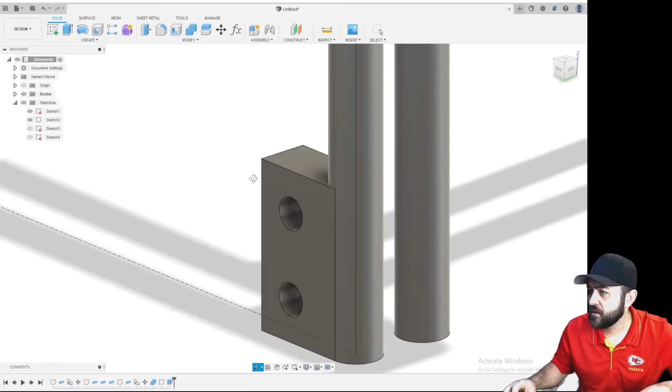Made a little block. We're going to go, rather than one side, we're going to go symmetric, and we're going to go 2.5 because I did 5 millimeter wide material. Say new body - you see how that kind of just blended into the tube then? Gave us an area for mounting.

Now these two tubes are floating here. We would want to get these connected to each other at the bottom. They're connected up here, all well enough, but these are not connected yet. So let's do...

You have one option, which is to hit construction up at the top, select your plane, and then move a plane out. Since we did that at 60, well, it should be negative 60 in this case - that'll get us a plane at the center of that tube. So we hit OK, then we can do another sketch at that plane.

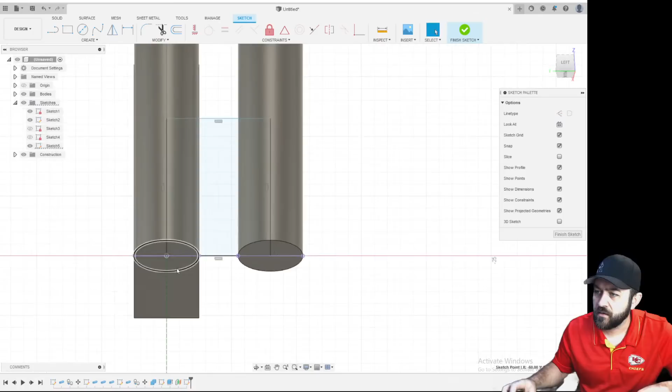We're just going to kind of connect the dots. If I want to, I can hit P for project and grab the bottom of these two, just to give me a couple of lines. We'll do a rectangular block from a midpoint, and midpoint there, we'll define a height.

12, do an extrusion, and we could just go to the inside 2.5 and do a join. That would kind of give you a little bit of tube detail still here at the outside, tie it in there, which would be fine. So now that bottom would be tied in.

From here, I'd want to do some filleting just to get it a little bit cleaned up. What happens if I put a 3 millimeter fillet? Looks pretty good there, let's do some around the top here. What happens if I do 3 again? Nope, doesn't like it - 2.5, we'll do 2. It doesn't want to fillet that at all, which sometimes it's just going to do that.

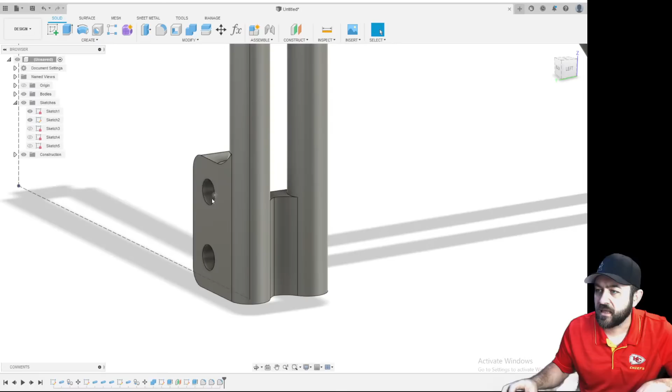There's a lot going on with these two blocks, so what happens if I do one there for a little bit of strength, clean up these. Something like that - gives you a mount at the bottom of the roll bar, helps clean it up.

If I was going to do this at the top of that roll bar, especially if I was going to try and do this in 3D printing, I'd want a little bit of support. So I'd select that surface just to get it at the same level, then I'd throw a 3.1 - let's offset that by 3.

Now from here, we could just kind of fiddle. If I was going to try and be a little bit more exact, I'd do a circle and do 6.5 millimeters, turn that to a construction line. 6.5 millimeters is a good size to think about for the head of a screw, so you want to make sure it doesn't interfere with anything. You can see I got that super close, so let's just call that done. That way we know a screw could go in there without rubbing the tube work.

That's not defined, so it's not the way I would normally do things. We're going to go -5, take it the other way. Actually, let's go -4 just to get it a little bit shy and keep some of that tube detail. And we'll go join.

So that would give you this little mounting point here at the top. It's a little bit ugly, but if you were doing this for 3D printing especially, take the hit, add some strength.

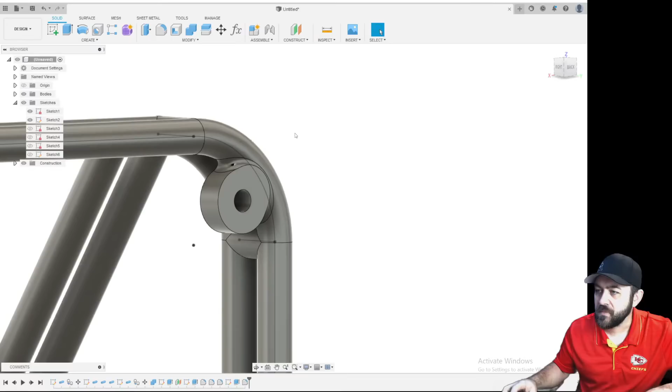I'm adding a fillet. 1 millimeter is about all it's going to let me do. So that would do that. Let's see if we can throw a 1 millimeter chamfer on. Nope, it won't let us chamfer, just how that fillet flows and everything. I was trying to chamfer just to get it cleaned up a little bit.

I might be able to chamfer if I don't chain. No, nope, I'm wrong. Okay, no luck there. But it's still probably worth it, it's hidden enough up there in the corner. So you have an attachment there, an attachment down there.

Only thing we would want to do is, depending on how this was mounting—again, this isn't proper because I didn't have any dimensions I was actually taking this off of—so I do need to attach something here still. If we do a construction offset, I could probably pull this out, and I likely did 40 millimeters, so we'll do that.

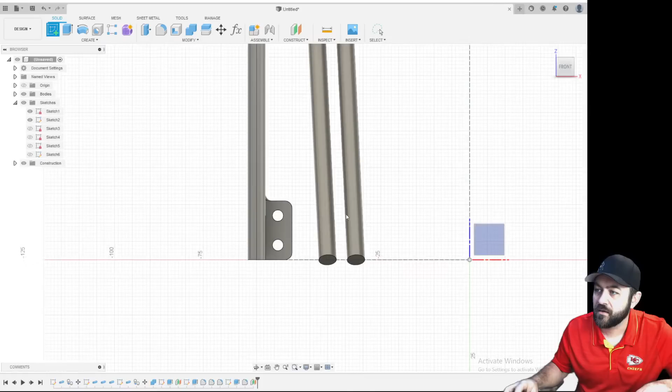Do it on that plane. And we'll just pull something out like this. Say 12.

Let's do 6 millimeters. Oops, 6 millimeters tall. I'm going to do a project to grab that surface, and then I can hopefully—it's not going to be a good one.

Can I do a tangent? That to that? I could, but it wants to pull it to the wrong place. Let's see if I just force it once more. Aha, success! And we'll just throw a 3 there. So...

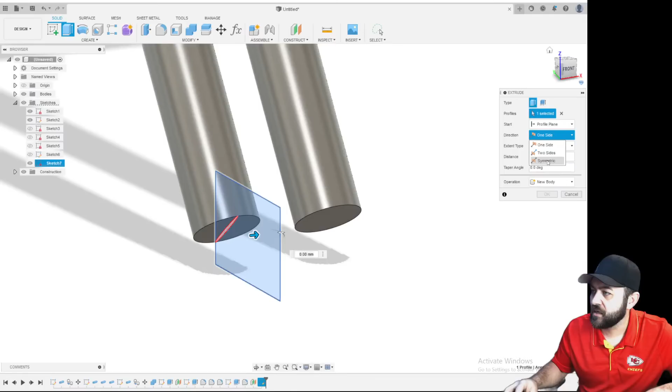Let's do symmetric 5 millimeter. Symmetric 5. Ooh, not each way, I want to go total. Actually let's go to 4 again, leave us some of that detail.

I'm going to leave this as a new body for right now, because I want to do some cleanup and trimming on it before we merge it in. I'm just going to grab these, throw a 2 millimeter. Why does it not like to do a 2 millimeter? Ah, when I extruded, I missed a profile.

There it is, now we got it. So now I can come in and select these. We'll throw a 2 millimeter fillet. I should have thrown the holes in there to start with, but...

Again, these aren't real attachment points because I don't have something that I'm drawing this off of, you know, body placement where the actual holes would attach. I understand that none of this is actually useful to you guys, but it's early on a Sunday—what do you expect from me?

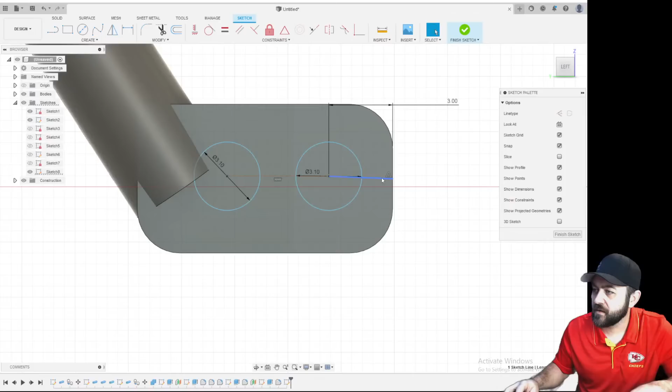And that... 6. And we'll do a cut through everything. We're going to go 2 sides, cut through both like that. It cut through the tube as well, as you can see.

I would probably want to clean up the back side of that, so I'd do a sketch, hit project, grab that entire surface, and just cut that so it would—see how it cuts that tube so that it notches? Up front as well.

Similar thing, like I was saying, 6.5 is a good distance for the head of a screw. So I'd select that and pull that out, kind of notch that tube appropriately. Make any sense to you guys?

And then from there, let's say this was going to attach to the side of a frame rail. So I'd want to do a sketch here. Let's find the midpoint of that.

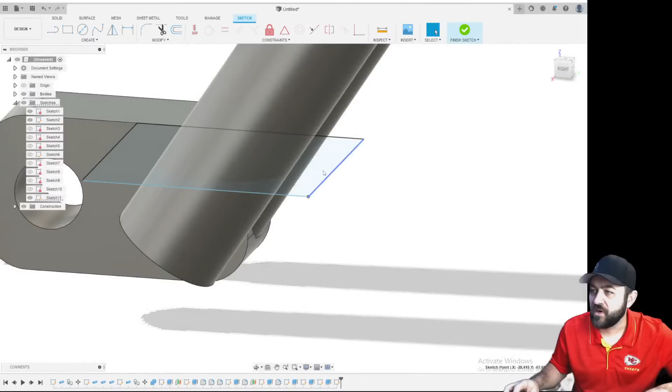We could come back—now I wouldn't have to fully define that because I could just select it and then cut down. Kind of clean that up a little bit. We could do another sketch on top of it.

Hit P for project to grab that, and then we could get kind of fancy and just connect some of these pieces of tubing. Let's do something like that. Add some tangent constraints.

And just for no reason—no reason, like the movie Rubber. So this isn't going to be... I kind of hate what I just did there, but that sucks. I'm going to leave it, but I hate it. Just so you know, I think I did a bad job there. I'm not saying that that's good work. That is ugly, ugly work.

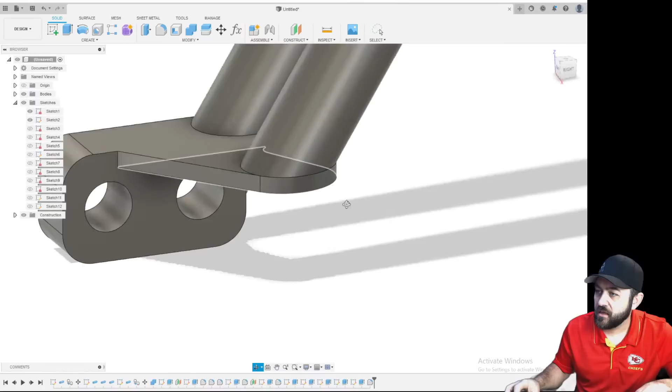Ugly and too thin, not strong enough. There's lots and lots of problems with what I just did, but I was just kind of tying it in so that it would be able to bolt somewhere. That should have been further down, given that more room. That whole deal. But I would go through, I would do all of that.

We would come in, we'd hit mirror, select the body, select the mirror plane, and you'd end up with a kind of simple, fairly ugly, nothing special roll cage. You know, that's what we did.

So you would want to have an actual design in mind. You'd want to have your truck next to you, a set of calipers, or even just a ruler. And you'd want to start measuring where your attachment points are going to be on the body, with the chassis, whatever it happens to be. I flew through that stuff. That wasn't, I'm sure, very helpful, but maybe you can at least see the thought process I went through.

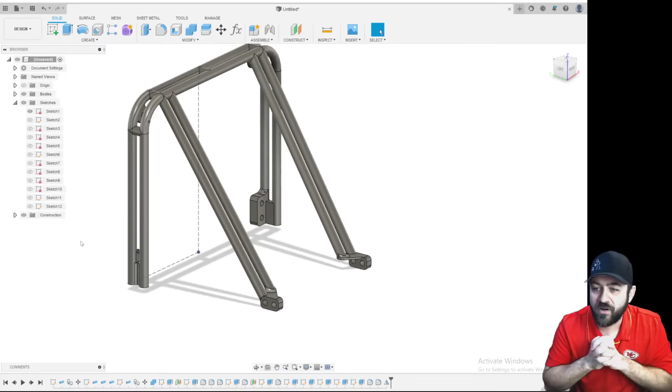This would have been for 3D printing. That's why I joined all of these parts together. I put big fillets in areas and attachment points. This would not be a functional design to fabricate by metal, but at least you can kind of see what we were thinking if you went with 3D printed.

It's something to think about. You could do this type of stuff, especially if you're looking for more just detail, not function. 3D printers are fairly decent, but if you want something that is gonna hold up or have any sort of benefit to it, 3D printing is not it. But that's not always what people are after. I get that.

Maybe, just maybe, something in all of my babble today was helpful. I enjoy 3D design a lot. I know that these streams are not the most popular. They are still a lot of work. They can still be a little bit frustrating for me and for you, I'm sure.

You know, when I forget to change the camera to see what I'm actually talking about, and I can't pay attention to the chat very much. So I just sit in here and I'm talking to myself while being less than helpful at times. Maybe a tip shows up here or there for you guys.